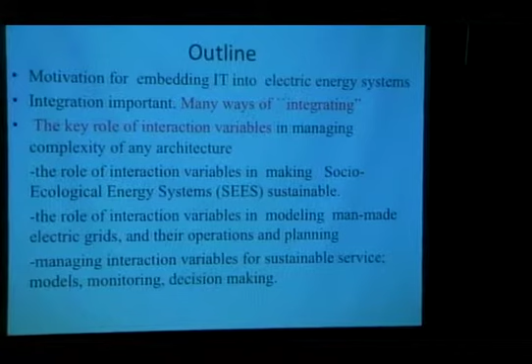And then I will illustrate this abstract concept on several representative electric energy system architectures. Sooner or later it becomes clear that these interactions between different portions of the complex system have different natures. They can be temporal, spatial, or contextual, and I'll talk more about contextual. One way to get into the scalability problem, into the role of IT, is by understanding these interactions and the complexity that comes from temporal, spatial, and contextual interactions.

Then I want to take a step back and say, look, we've been doing this in traditional power systems for so long — what does this mean for the way we've been operating the systems? Can we operate today's systems better without adding new technology? Can IT fundamentally improve performance of today's architecture? And then say something about the evolving architectures.

I think this is probably not news to anybody in the room: there's a massive integration effort at the US level and worldwide on integrating communication systems, control systems, and rethinking economic and policy approaches for the changing electric energy systems. This opens an opportunity for people who work in high-tech technologies. But what we see is that the hardware is already being deployed, while rethinking the integrative software to help that hardware better fit into the legacy system is trailing behind.

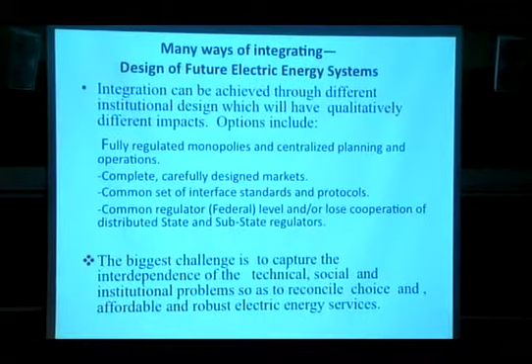So when we talk about integration with traditional power systems people, they understand exactly what integration means: top-down, I plan, I have full information, and I schedule things, I'm fully in control of everything. If you talk to people from different disciplines, they'll say, well, I can achieve integration many different ways, by designing complete electric energy markets.

We have not designed markets for performance — we've done something, but not really designed them for performance. There are a lot of people at the National Institute of Standards working on interface standards and protocols to integrate, and that's really not top-down. So there are very different ways of thinking about integrating future electric energy systems for performance.

One of the questions boils down to how much coordination you need. If you think about the entire US interconnection energy system, how much is the responsibility of the federal level to coordinate, versus how much can be done at the distributed state level. There are many examples of this, but the point is you can do coordination in very non-traditional ways compared to how we've grown to think about it in power systems, and that opens the door to many disciplines: distributed control, distributed communications, etc.

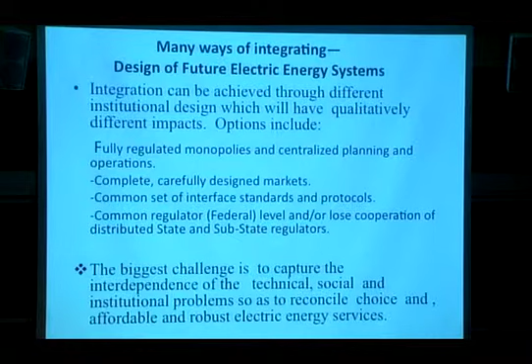So everybody is talking — people who know those tools say, well, we can apply them; people who have good hardware say we can put good hardware on. But there is really no overall school of thinking on how to do this, and the challenge is to capture all of these interdependencies.

So one way to begin to think about this is, again, the objective ultimately is to have intelligent physical electric grids enabled with IT to somehow enable more sustainable, in this case, energy systems, social ecological energy systems.

If you look into what we know, people who worry about climate change use some fragmented, fairly coarse models of these energy systems, with certain relationships at a very general level. Then you talk to power engineers, they're talking about fragmented models of detailed engineering grids, interested in answering different questions. In the middle of that, you don't have models on either side that talk to each other, and you need to design this IT for smart grid in order to enable a sustainable energy system by doing good, smart engineering design.

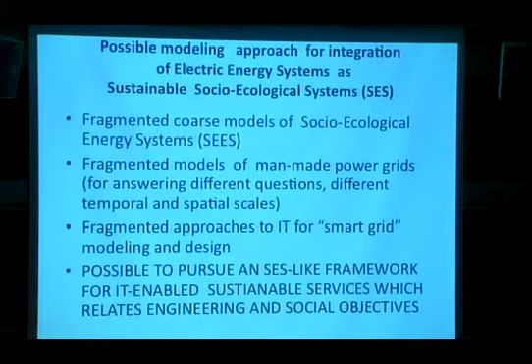So it's clear that we have to really worry about the possible modeling approach first.

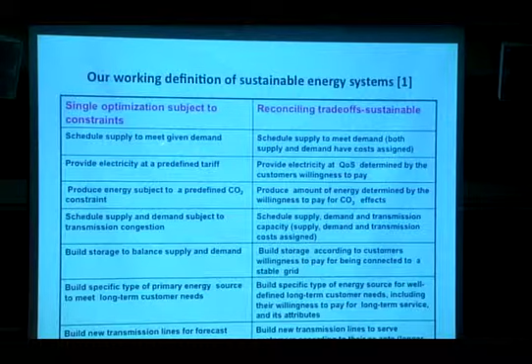So this is our working definition of sustainability and how things have changed in the past. This is what power grids have done: they schedule supply to meet given anticipated demand, provide electricity at a predefined tariff, and produce energy subject to constraints. So everything used to be single optimization subject to a lot of constraints.

And the consequences of these are many. Everything that was constrained becomes an externality. You can't give incentives, etc. So the story is very long.

I think that in order to have a sustainable energy system enabled by a smart electric grid, you really have to begin to think about adaptive reconciling of trade-offs, and that effectively becomes a sustainable system which accommodates a lot of choice, if you wish.

So you don't schedule supply for predicted demand. You schedule supply to meet demand in which both supply and demand functions are given, so there is a choice from the demand side. You provide electricity at quality of service determined by what customers want to pay, etc. So it's been a really qualitative change here, and you can go down many attributes now that become attributes, and you can have different trade-offs depending on what users actually need, in contrast to having a single optimization.

It minimizes total generation cost subject to everything else being constrained. So this is what we mean by sustainable.

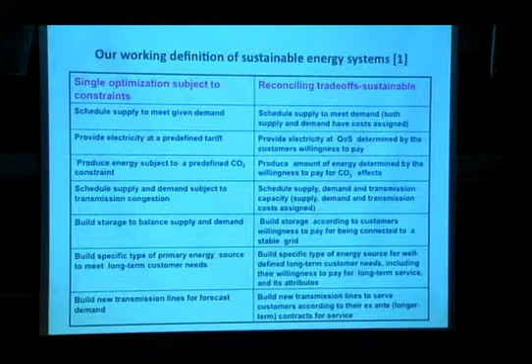Okay, so why is this so hard? And I have to admit, after 30 years of being in this field, and I think I know power systems pretty well, it's actually hard to take the step back and identify what is the difficult question, and if we were to make some links there, maybe we can make some progress. This is what this talk is about.

So I think in a nutshell, the most difficult question in designing IT for energy systems is how to establish a sufficiently accurate but not too complex modeling framework which captures interdependencies between energy, social ecological systems, physical grid, its IT, and the governance system. We really have not done that, and there is no school of thinking.

And so, again, as I said before, if you are doing climate change, you are doing very coarse models. If you are doing nitty-gritty frequency regulation you use different models, so how do you put them all together? But the objective of all of this, and the objective of using IT, would be to match the attributes of the energy socio-ecological system by designing around a given energy system.

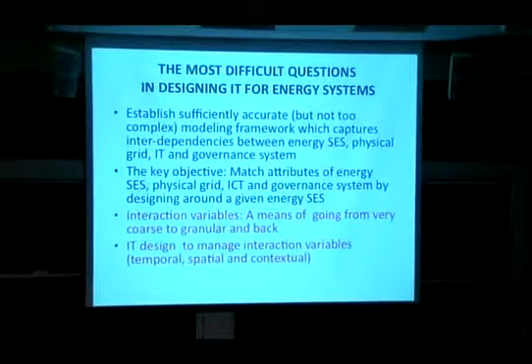So in other words, you have some energy resources, you have users with their needs, and now you want to somehow match them with the physical grid and its IT, and how to do that. I will argue that one possible way to proceed, by actually modeling what matters and not being too complex, would be to think in terms of these interaction variables.

Different students at CMU have been working on this over different time scales, but pretty much the same idea, on how you would actually do a sufficiently good model for whatever. How would you do a good model for power electronics control to stabilize your kinetic energy in your generator? You can think about that problem on one time scale the same way as you think about scheduling at a different time scale, if you think in terms of interaction variables. So it's potentially generalizable. It's not all done, but I will share as much as I know.

And then the whole problem boils down to the question of, if I model my system in terms of interaction variables, then I design IT to support performance of the interactions between the systems. And that goes across temporal, spatial, and contextual dimensions.

OK, so what does this mean? It was heavy, and it's been heavy for me also, so I had to explain it. But if you think about it, this is actually not that new an idea.

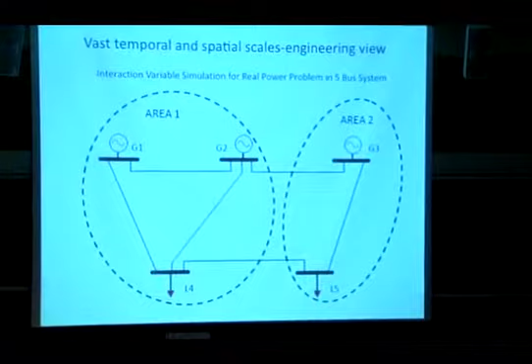There are no electronic valves here to actually directly control the flow, unless you have DC lines or power electronically controlled flows. But in principle, if you have a disturbance here in this power area, in this utility, you're going to see it in the other area. That's the interaction between the two control areas.

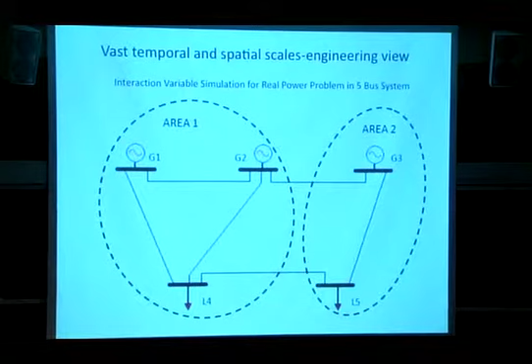So we know how to do that well. I have spent a lot of time actually formalizing these models for hierarchical control on the technical side. And this is what you're going to see, at the time scale of seconds, for example.

Now, a more formal definition - I don't have time to spend on the mathematics of this, but I could give references to people if interested. The interaction variable associated between a particular subsystem and the rest of the world is a very particular combination of internal state variables, which doesn't change if you disconnect the subsystem from the rest of the world. So it has a very good technical definition.

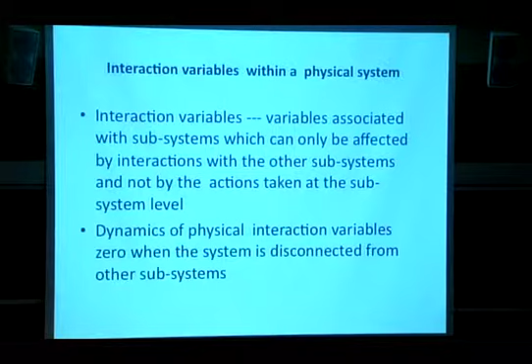For people who do automatic generation control, that's your ACE, area control error. You control the total imbalance between the subsystem and the rest of the system. And if you capture that, rather than each particular imbalance inside the area, you have a much less complex model.

And now comes this socio-ecological system. I want to model my engineering system - I want to design the power grid and its intelligence so that I actually make the socio-ecological energy system sustainable. This is directly from the work by Elinor Ostrom. If you think about it, it's a very similar thing.

She says, I have resources in the system, I have some governors, users, there are interactions between them, but they are at a very different time scale and very different coarseness.

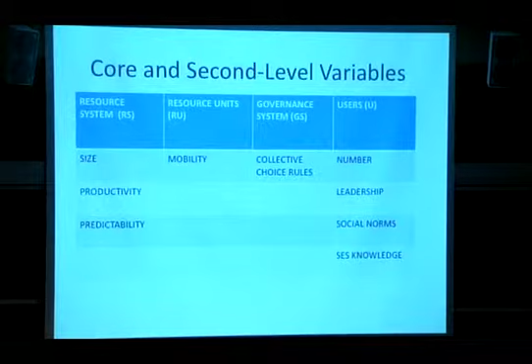And what I found fascinating, and I've been playing with this now for two years, so I think it's time to come out of the closet and talk about it.

So this is your social ecological system. You have resource system, resource units - these are what she calls core variables in any social ecological system. There is a particular governance system and users. And these core variables, there are only four of them.

For any social ecological system, for water, for energy, whatever you choose, they have these second-order variables that characterize the nature of the resources according to size, productivity, predictability, or even mobility. Do I have electric vehicles, or do I have stationary resources?

Then different socio-ecological systems differ depending on what governance systems you have. In particular, it's important you have collective choice rules. And the users - this is very new for energy systems, for power systems - what is the number, what is the leadership, what are the social norms, etc.

Now this is again from her work, but the key role of interaction variables in any social ecological system is to first define the core subsystem variables, define second-order variables - in other words, what are the characteristics of these resources and users - and then use these second-order variables to determine how likely the social ecological system is to be sustainable.

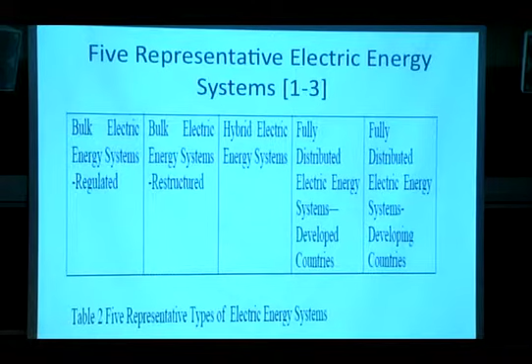I don't know how far or how fast I'll go through my talk, but at least I want to make sure I illustrate the main messages. So in a fully regulated bulk electric energy system, you have these very large, not mobile resources, generators far away from the loads. And there are objectives of individual utilities, and they can maybe exchange power or not, depending on things - there are no electronic switches unless you have DC lines.

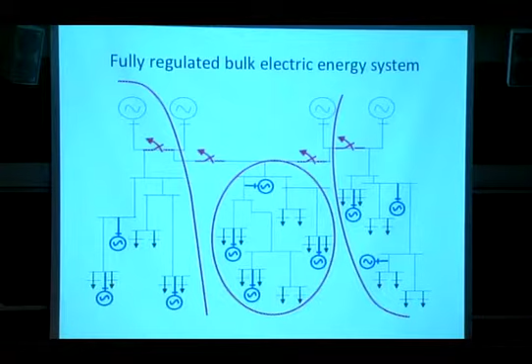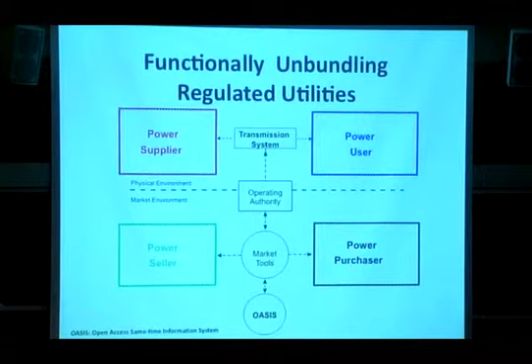And more and more we are having these distributed resources which are coming closer to the end users. So in the unbundled regulated utility, you have power suppliers for themselves - that's interaction between power suppliers and sellers, very different interactions. Here, the utility is in charge of all of them. In the restructured one, power suppliers are sort of nested inside the utility, and they can be decision makers for themselves. So you really don't have a one-to-one mapping between the markets and the physical system anymore.

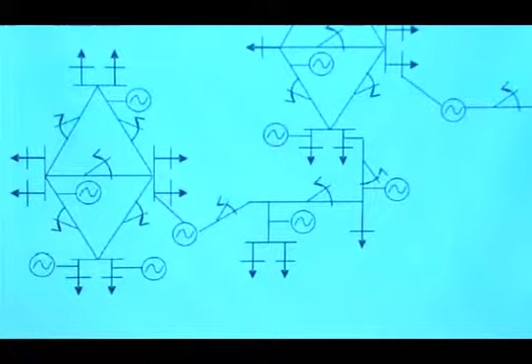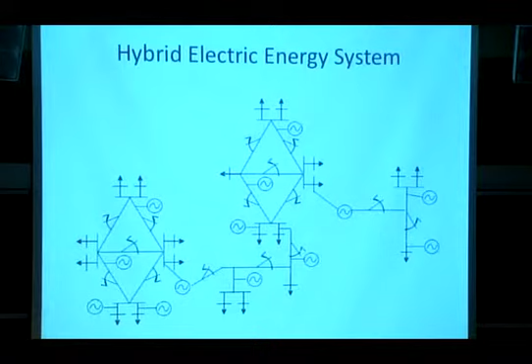And so I can redraw these new architectures basically as either being hybrid electric energy systems in which I have a portfolio of generators and users with their own objectives, but they are not necessarily utilities, and they are interacting weakly. So the whole point of this exercise is to say that interaction variables between different portfolios will be different than interaction variables between the players inside the utility.

And then some people are saying I'm going to have everything fully distributed, control everywhere, down to the household level, etc. So clearly, even if you don't do the math on the interaction variables, it's clear that this guy is really in the noise relative to the rest of the system. He doesn't have to talk much, or he's not interacting that much with the rest of the system. So what we need to monitor and control is going to be very different than what you need to control in the large systems in which power has to come from far away.

Okay, so let me try to cover at least the case of the traditional power systems. Again, this is really a hindsight view - I didn't think about this as we were doing it.

Actually, the spatial, temporal, and contextual interactions are very significant because you have these large resources. Users aren't doing much in the regulated industry, so you have to have significant interactions and power transfer and intelligence between resources and users in the traditional regulated industry with large resources.

These interactions are even stronger when you have economic transfers between utilities, etc. However, if you look at the literature - and this is a story in its own right, an entire book - assumptions are made for simplification. So we operate. This is the only way that the complexity of the interconnected system, bulk power systems, has been managed with relatively little IT. It's because we assume that these interactions are weak across time, space and context.

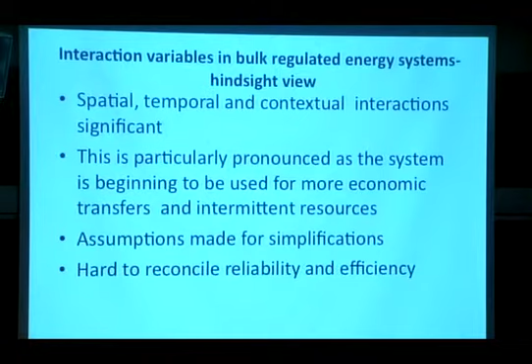So there must be some interactions, and we used to spend a lot of time modeling these things and running the analysis to see if the whole system can exist - what are the voltages, are they acceptable, is the system stable. This is a huge monster simulation. This is what most of the software IT in today's electric power industry does.

However, software is complicated, but at the same time relatively simple, because it really draws on these very strong assumptions: that each control area schedules its own resources, that a solution exists to the interconnected system while I'm doing my own, and that there is sufficient voltage support that the slow deviations can be regulated, frequency can be regulated control area by control area, etc.

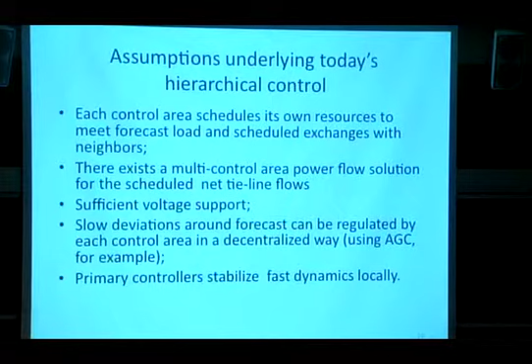And also the primary controllers, which only exist at generation - there is no control anywhere else - they stabilize dynamics very fast. So you have this fast stabilization which is local. You have regulation of frequency utility by utility, and then scheduling control area by control area. So the time scales are very separate, not correlated, and spatial separation is in place. Basically we simplify by ignoring the interactions.

And what happens during the blackouts is that a lot of these assumptions get violated, and there's a lot of literature that documents that. I don't have time to go through details, but basically the translation is that there are large spatial and temporal interactions which are neither monitored nor managed at the interaction level when you have large changes in the system. Because of that, you have very hard to anticipate outcomes at the interconnection level.

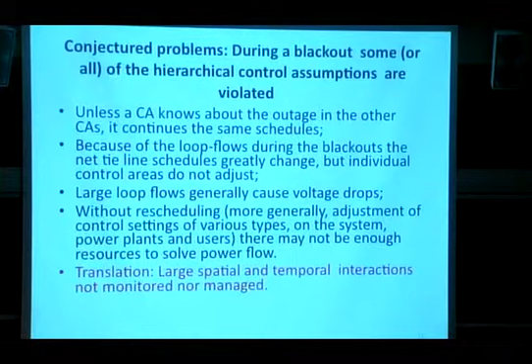So this is what happens. You assume that this is disconnected from that, but during the blackout, you had really huge circulation of power. These are your interaction variables at the very large coarse level in the Northeast. And this is where IT comes in.

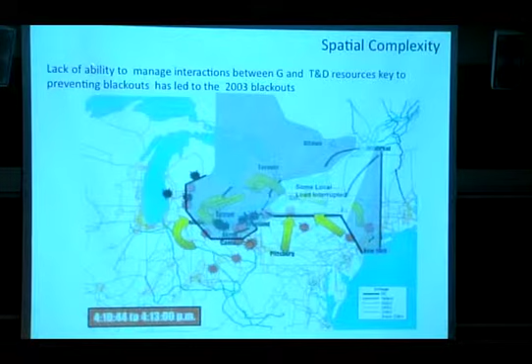Because of lack of ability to manage interactions between generation, T&D resources, we actually had this blackout, and it's documented quite well. There are some really interesting numbers that people have come up with. Part of the problem occurs because there was a shortage of power here, excess power here, and then the power was trying to go from Pennsylvania to New York, and the power transfer could only manage so much. So Pennsylvania was not coordinating with New York, etc.

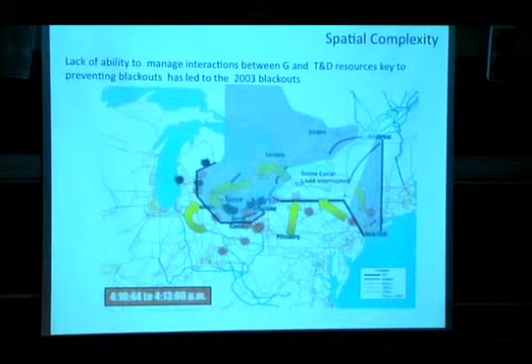So basically, the minute you cannot transfer power that's being produced here and loads are not reacting, you have excess power and frequency starts collapsing after protection disconnects other devices. That takes time, like several minutes, but that's what happened. So clearly, you have a case here of very strong spatial and temporal interactions, which today's software can't manage.

If you were to do some very simple things, if you were to coordinate real power generation in the neighboring areas, you can increase - I believe these are just numbers, I'll go very quickly over them. The interface - if nobody does anything, so there is an outage, let's say in Pennsylvania, New York doesn't know about this - the interface limit between New York and PJM is 100 megawatts.

If the other areas knew and they rescheduled their own generation to support that outage, the interface limit would be 1,200 megawatts without building any lines. That means there is a very significant throughput that you can manage if you knew what's happening on the system and reschedule something in a more coordinated way.

Voltage scheduling is very significant. This is for people who are into voltage. You can actually increase that interface another 1,000 megawatts. And phase angle regulators, power electronics control, is just magic. It actually changes the electrical distance exactly where it should change, and the throughput goes to 8,000 megawatts.

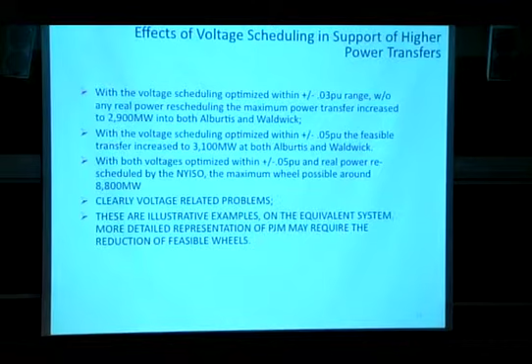That means, so when we talk about building new transmission to deliver power, wind power from Dakotas to Atlantic states, we better think about this, because you can either build, I think they're talking about 200 billion worth of wires, or you should think about how to use the wires that you have.

So that all points out to the direction that now becomes a general theme, even for the changing architectures. And the theme is that because of complexity, you have to begin to have multi-layer, multi-directional coordination within the interconnection, in terms of interaction variables, and you model them that way. In other words, you don't have to exchange the full information between every single detail, but basically you exchange only the minimum if you model your system in terms of interaction variables.

So just some examples of, depending on different scenarios, if you support the voltage or you don't support the voltage, if you have scheduling by neighboring areas, these tie line flow limits between New York and PJM, et cetera, can change so significantly. That's unbelievable. And that's what IT is doing.

Okay, and also if you think about the typical temporal change, the real power tie line flow exchange between New York and Ontario, for example, as a function of controlling different gadgets like settings on load tap changing transformers or capacitor banks or settings on generators, you're going to get very different tie line flow exchanges given the same wires.

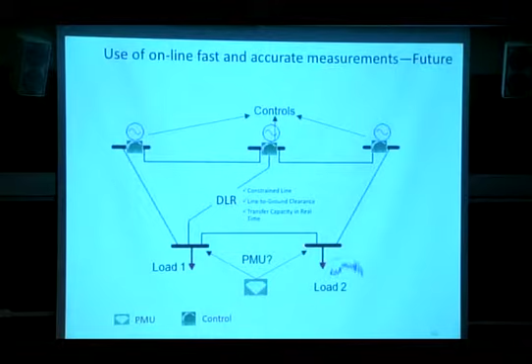Now there are these Phasor measurement units, which are effectively very accurate and fast measurements that you can put on the system. And the question is, even on this simple system, here is the disturbance that you want to manage. Where to put the measurement? Or this load, once the measurement is done, should it talk to this control on the generator, or the other?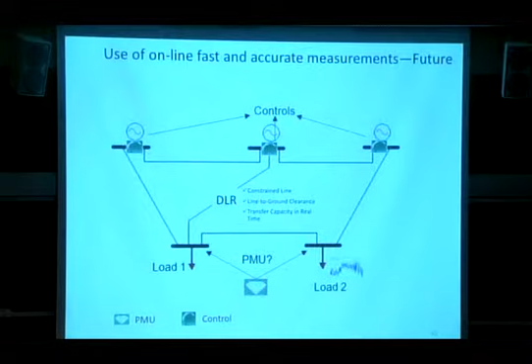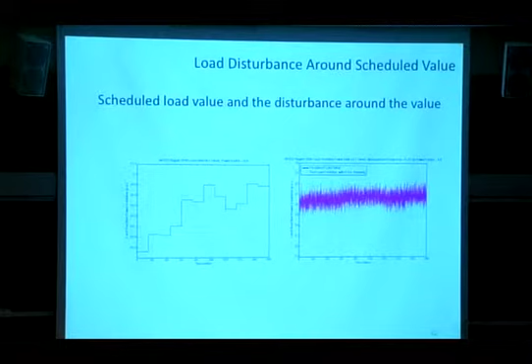These are all very clear control questions and IT questions. So the point being here, very quickly, is that what we have done in the past in today's industry is schedule generation for anticipated demand. And now with these fast measurement units, you can actually manage the unanticipated fluctuations around the schedules, very fast ones, and still maintain state variables within the acceptable limits.

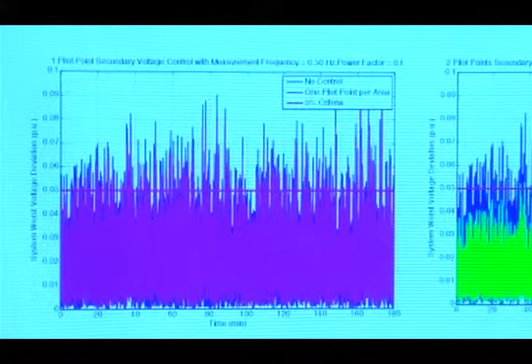Let's say this is voltage, 5% deviation during the outage. If you have partial control and partial sensors, if you just have one sensor, this is what's saying for this simple example, you are still going to have violations of your acceptable voltage. If you put two measurements and design your control right, you're going to stay within the acceptable limit. It's unbelievable how much the control can buy you, but actually this example is the first one of its kind.

on closing the loop with PMUs for control. We are just doing pretty much PMUs for situational awareness, to know what's happening on the system, but not for closing the loop. I'm arguing that you really have to close the loop in order to take advantage of what can be done.

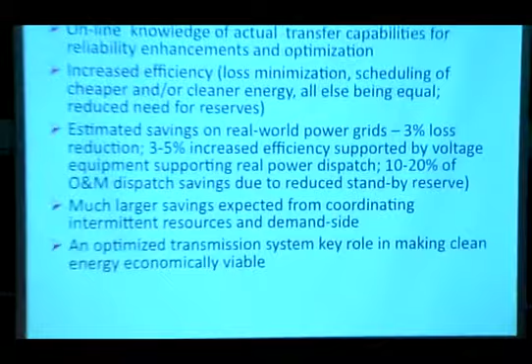Okay, so there is a lot of hidden value of smart IT-enabled transmission system management, even in today's regulated industry. And some estimated benefits are 3% loss reduction, 3 to 5% increased efficiency, and this one is huge, 10 to 20%

decrease in reserves that you don't have to have, because you would basically react just in time and just in place. In other words, you would be moving from what is known now as preventive worst-case design, where you have standby reserve just in case something happens, to where you adjust other resources when the contingency happens and you don't have to have that reserve. 10 to 20%, FERC has estimated these numbers. This is huge.

So one has to begin to play that game when you have a lot of uncertainties on the system, either outages or intermittent resources from new systems, and there is a potential to squeeze much more out. So this is all even before we started talking about the new architecture that is evolving because of distributed generation.

It looks like it would be nice to do, and there are potential benefits, but there is a lot of work to do on design of IT. As I said, the whole thing evolves around capturing the right spatial and temporal interactions to have this right trade-off between reliability and efficiency. That requires careful modeling of interaction variables.

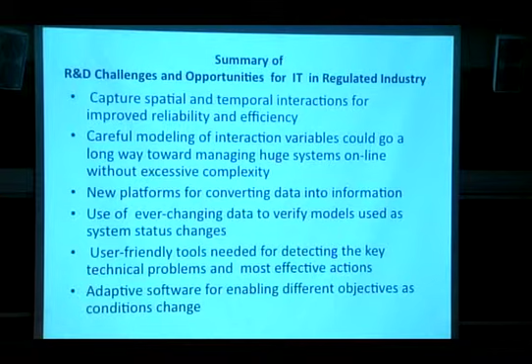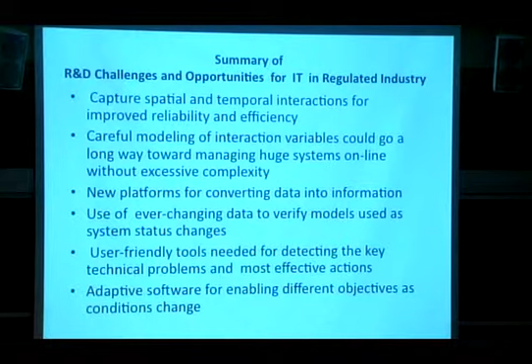So this is in a nutshell. This is really the status in the regulated industry. There's a huge potential for IT, but one has to walk very carefully through what matters and what doesn't matter. Now, just a little bit about the new architectures.

I think everybody is talking about it, sort of understood, but again, I want to tackle it from the same angle - that now we are having much more action at the customer automation side. We have potential for much more communications. We can have direct power flow control devices, DC lines, etc. So these are the technological advances - microprocessors, sensors - everything has come down to cost-effective, reliable technology.

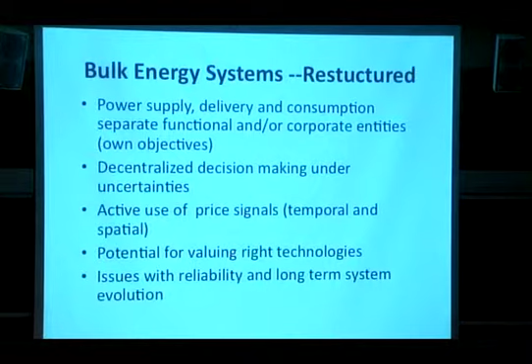So what to do with it? At the same time, some parts of the country have gone through organizational changes. So depending on what we are doing, the architecture is different. In the restructured industry, before we put in new devices, we already are in the domain of decentralized decision-making under uncertainties, because you have transmission owners, generators, loads - they're all deciding for themselves and somehow interacting. So there is an additional source of complexity.

There is interaction, heterogeneous interaction between the physical system and the economic signals. And you can generalize it because there is nothing that says the interaction variable has to be just a physical variable. Timelines are now even more complicated than in the past because we have the interplay between technical decision-making and market decision-making. One big thing I'm sort of stuck on is that what we have done so far in the US is we have these spot markets, which are day ahead, so there's very little transparent information about the long-term future. I want to argue that this is one thing we must capture if we are going to have efficient markets for the design.

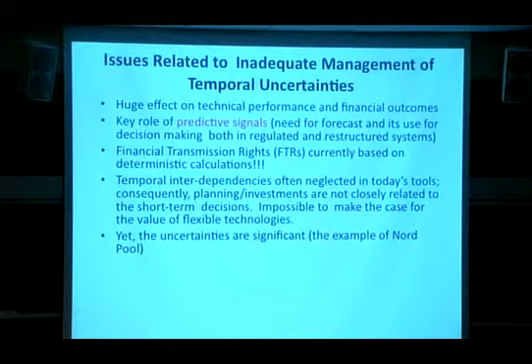And only one thing that I would like to point out about markets, and this is this problem about managing uncertainty. So we are not that much now on interspatial interactions. We are more on intertemporal interactions and uncertainties, which come with markets.

And there, I just want to give you the case that for me was a striking case. In the Nord Pool, people have both spot markets, which is day ahead, and financial markets with 3 years in the future. And this is how the market clears over different time horizons. It's transparent. So you can look at the historical spot prices in Nord Pool, and you look at the historical future price.

These are anticipated prices due to the long-term forward markets. And you look at their difference, and this is what happens. This is all the arbitrage, the uncertainties that you see. You cannot invest well because you don't know what's going to happen in the future.

And one way to capture that, this is work with Audun Botterud. These are real data, the only real data that I know of. Depending if you have forward market 1 week in the future that clears 1 week, 4 weeks, etc., you're going to have different standard deviations, which are larger and larger as expected.

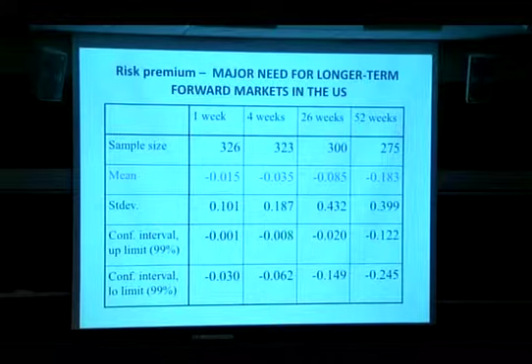But all what it's telling us is that there is a major need for longer-term forward markets in the US. You can't get away and be efficient with investments unless you have just spot, and people just choose to ignore it. And again, it has to do with these temporal interdependencies and the efficiency that comes from temporal correlations, which if you don't know, you're going to overbuild without taking into consideration what's going to happen in real time.

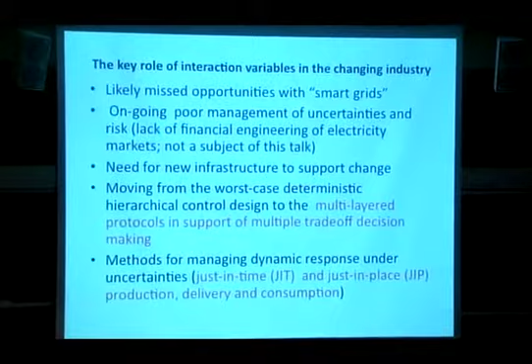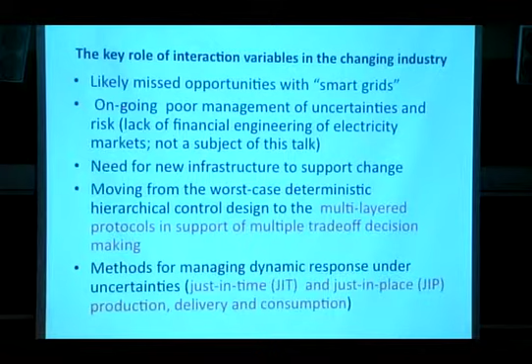Okay, so this is on markets. I did the regulated one. I want to just say maybe 5 minutes something about the same thing happening when people talk about truly smart grids, when you have wind power and adaptive load demand, etc. We have to begin to think again here.

It really comes down to the problem of modules of one sort or another interacting and capturing either physical or financial interactions through the information. And depending on what is captured, how these modules talk to each other, you are going to have better or worse performance even in the distributed system.

One thing is for sure that if you have a truly distributed system, these interactions are relatively weak, so it doesn't buy you much to coordinate. And this is why people think that you just self-manage yourself and you're done as an agent. Well, if this is a portfolio of a few things, then that interaction between the cluster of small resources and some other cluster may still be significant. And the question is how to model that and when is the threshold that, okay.

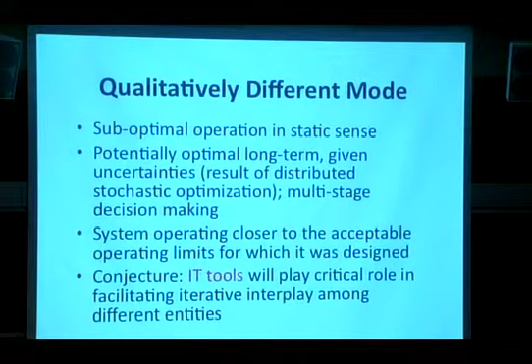So this is again interesting from the point of view of what IT you need to embed into which level in this distributed changing industry. So basically you have smart components and smart control at all levels, supplier, user, transmission. And one thing that we have to understand is that this is really not an equilibrium condition anymore. You are not doing static optimization. It's potentially optimal long term under uncertainties, but it is a result of multi-stage distributed decision making by different users. And IT tools will play a critical role to facilitate that interplay between different entities.

So we can go one by one, but just as an example here. Smart power producer, he has his own goals, profit maximization and risk management. He is going to embed IT, which is decentralized stochastic optimization, some agent type technology. But his different technology that he has locally, storage or combined cycle power plant or whatever, is going to depend on the industry structure in which it coexists. It depends on how much he connects and how much he interacts with the others for efficiency.

So that goes across the users and smart networks. And I think in a nutshell, this is what very likely happens. We are going towards flexible open access integration, which is really a change of paradigm compared to the hierarchical control that I was talking about. So you have models and intelligence at the distributed decision-making level. And then one employs just communication to provide the relevant information online. System users observe the status of the system and internalize it into their distributed objectives, and this is how coordination happens.

And IT just makes it happen. It's a sort of 'make auctions work.'

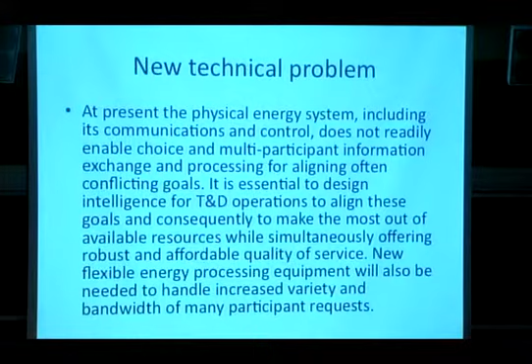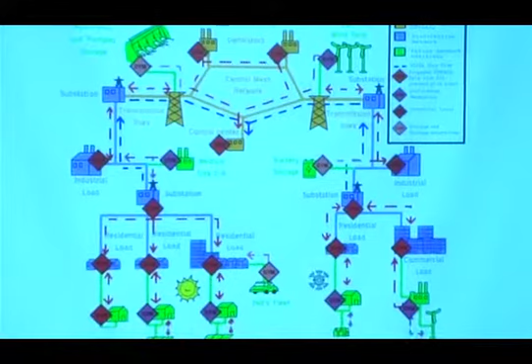I want to end up with just a few pictures. So if you adopt this interactive distributed paradigm, you can embed a lot of intelligence—we call them DyMonDS, dynamic monitoring decision systems. You can put them into households, groups of households, into different technologies. You need your own model and your own decision variables. Your decision tools anticipate or exchange information with the rest of the world, then you do your decision making, then you tell the higher level entities, maybe a control center, how much you want to consume and at what price. But after you've taken into consideration the startup cost, rate of response, etc., you've internalized that. So the information you give back to the system operator is simple enough that he can actually use existing tools for clearing those bids and still clear the market.

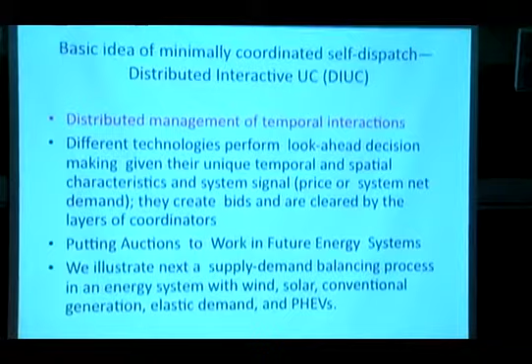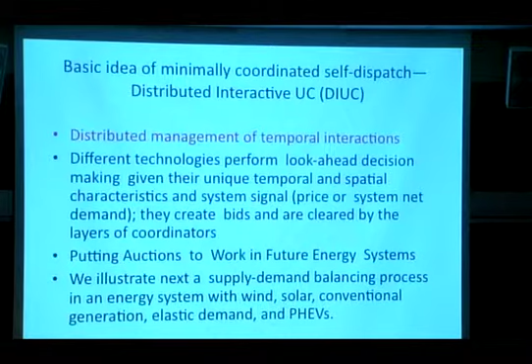So the system can evolve. This is not really radical. The basic idea we are pushing at CMU is distributed management of temporal interactions under uncertainties, adding those and interacting with the existing tools you have on the system, at the system level.

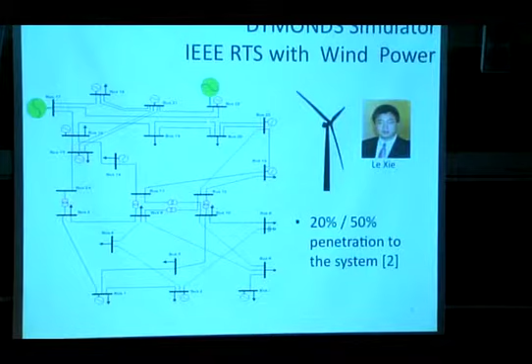Let me show very quickly what this means. So, a power system with conventional generation, you want to put in wind. This is Le Xie—he just finished his PhD thesis on what intelligence you have to embed into wind power plants to operate the system better. If you have predictive control at the wind, model predictive control controlling the wind blades, or you schedule a unit commitment in a distributed way, you find some really fascinating things.

This would be the wind that you would just send to the grid if you didn't have additional decision making. However, you adjust and don't send all the wind, because you don't get paid for that. At the same time, you can store that wind locally. The consequence is that you don't have to run your fast gas power plant, nor build it—you have very little use for a gas power plant. This is an unbelievable saving just from internalizing the temporal constraints at the distributed level.

And it has consequences for how you schedule your conventional power plants, because if you look ahead at the distributed level for anticipated conditions, you can begin to ramp up even a slow power plant, and so it goes—you can better utilize even the conventional slow assets when wind blows.

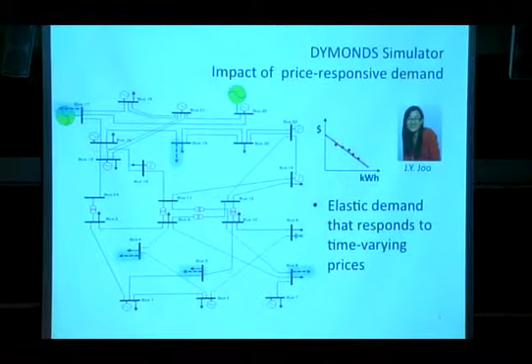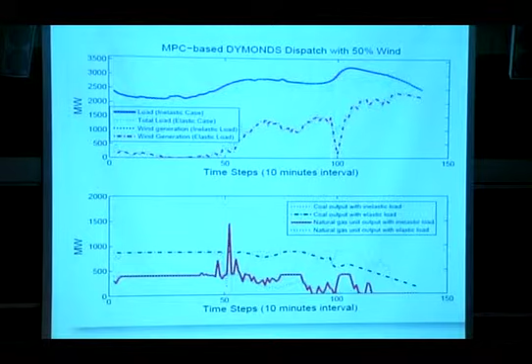And then you gain big time if you combine wind with responsive demand. JY is doing her PhD thesis on that—we're very fond of it, because basically what happens is, if this is your anticipated system demand, when the wind doesn't blow, price-responsive demand just dips in, and you don't have to build anything else. They come together through the right interactions. The consequence, again, is that you don't have to schedule the gas plant to be so picky, and the estimates on how much you save on investments and expensive fuel are really unbelievable.

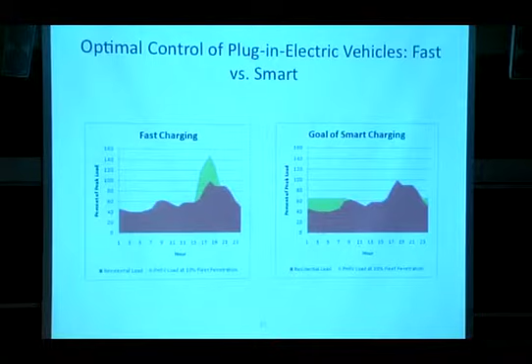I think we need to move from this IEEE example to real systems to see what that really means. Nick did this for electric vehicles. Electric vehicles are, for all practical purposes, just adaptive demand, and this figure has been shown many times. But if electric vehicles just do fast charging, the electric load that utilities see may be such that they have to build new power plants. If you do just a little smart management, you don't have to build new power plants.

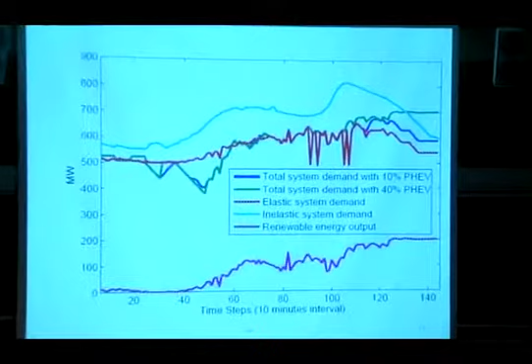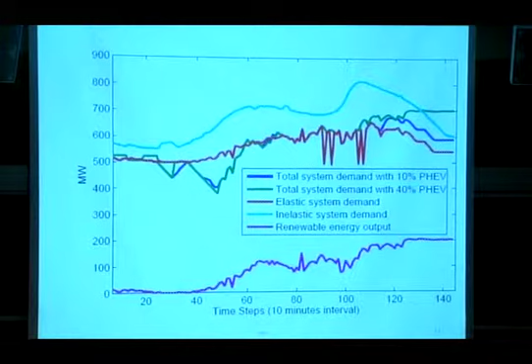And so, again, some hypothetical simulations—depending on what penetration of electric vehicles you have, you get very different outputs, but you squeeze the resources just in time and just in place through the right interactions. And I think that this is where I should stop.

I guess I would like to close by saying that we are very likely moving into an environment in which there's going to be a need for a lot of smart aggregation and interaction within. You cannot separate the effects. It really pays off to build a portfolio and to interact, to work closely in a cooperative way. And then there are weak interactions, or you can still gain something from the weaker interactions. But this architecture for IT is very different than the organizational one, or the one that we have right now. So I'll stop here, thank you.

Any questions? Yeah, please. I was just wondering if you could tell us how some of the simulations were done, showing the chart.

Okay, so for the regulated industry, there are really large-scale nonlinear optimization tools, in which if you want to show the effects of voltage optimization, you really have to run nonlinear AC-OPF rather than DC for real power dispatch, and state-of-art data is pretty poor also. So we did our own simulations.